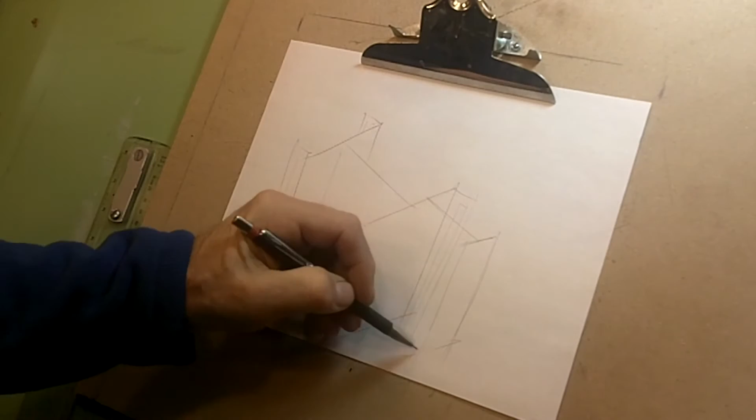I need to make some modifications to my anvil base. The overall design works great and I'm happy with that, but the hardy holder never quite worked the way I expected it to, so I need to rethink that and come up with a better design. Also, I want to turn this anvil base into more of a workstation, so I'm going to be adding in the beam that I'm going to use for my stake anvil support system.

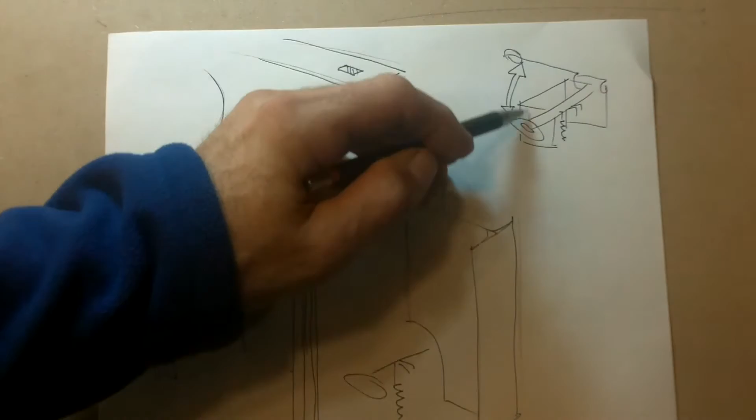So this is basically the setup that I'm after. I'm going to be switching out the turnbuckle hold down tool that I'm using now for a spring activated mechanism that's going to be located in the same spot. I just want to be able to lift the handle, slip the chain into some kind of a grab hook, and then release the handle and let the spring tension hold the hardy tool in place.

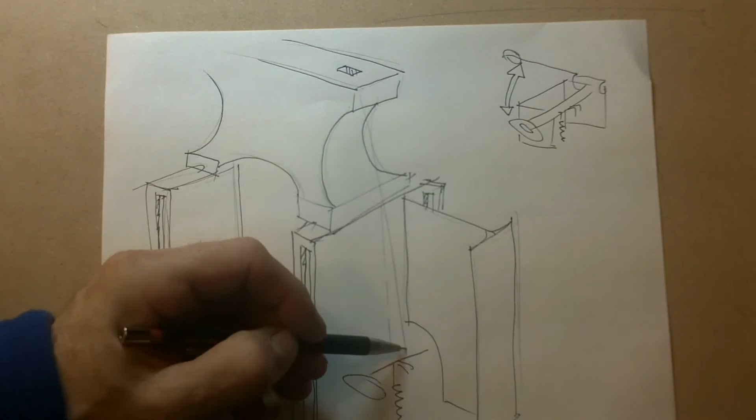I'm going to be mounting the workstation beam to the back outside corner of the anvil base. I'm left-handed and I always work with the anvil pointing left, so this back corner of the anvil never gets used for anything, so it's a perfect location for extra equipment or tools. This also moves the beam off the center line of the anvil, so I have a clear shot from the grab hook of the hold down to the base of the anvil.

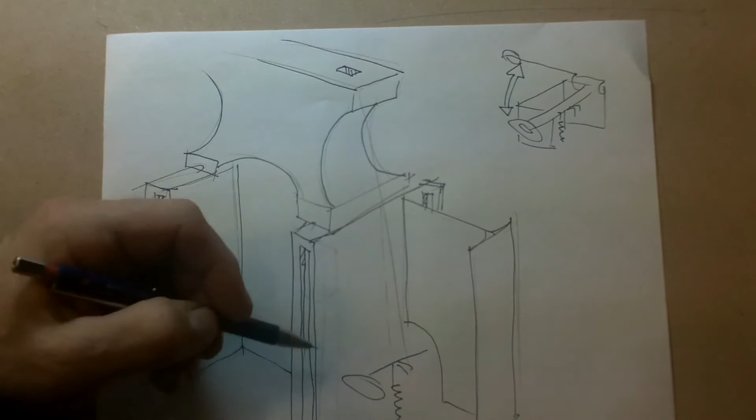Depending on how I build that spring activated handle, I may need to relocate this track to the inside edge of that corner of the anvil. I don't want to eliminate that track, but I'm thinking I might need to move it to the inside to give me a little more access to that handle. And lastly, I need to relocate that pivoting tool caddy that was mounted to the back inside corner of the anvil base, so the pipe that's sticking out off the base is going to have to go.

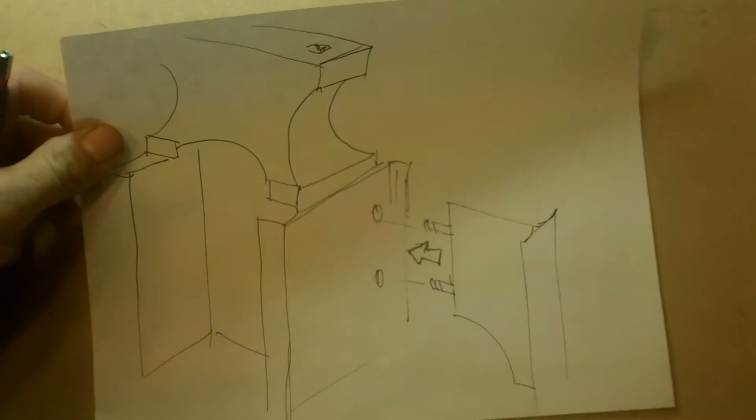I'm not going to be welding the workstation beam to the anvil base. I want to keep my options open. So I'm going to be bolting the upright of the workstation beam to the anvil base so it can be removed easily. I may need to weld the bottom edge of the workstation beam to the anvil plate, but that'll be a very accessible weld and very easy to grind out should I ever decide to remove this beam and modify it.

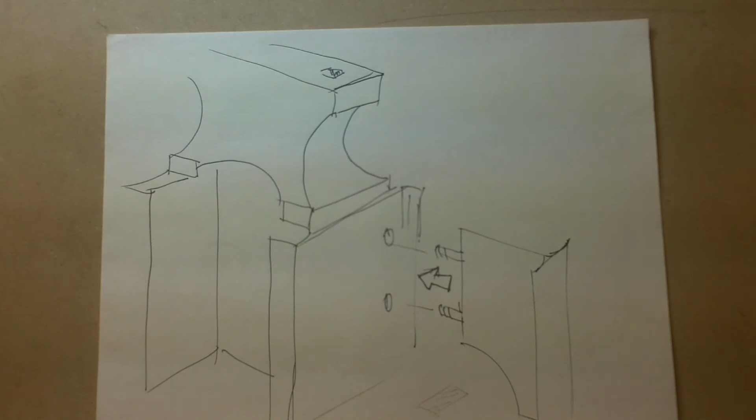I'm not going to bother doing a lot of design work on this. I basically know what I want to do, so I'm just going to head out to the shop and see how the parts go together.